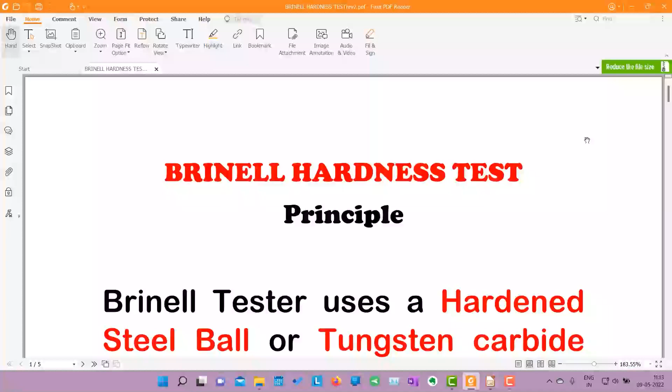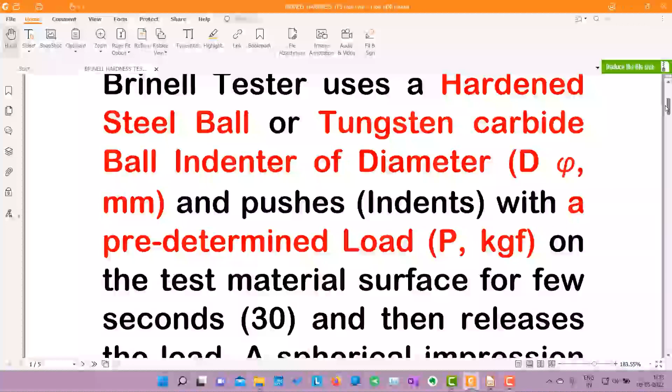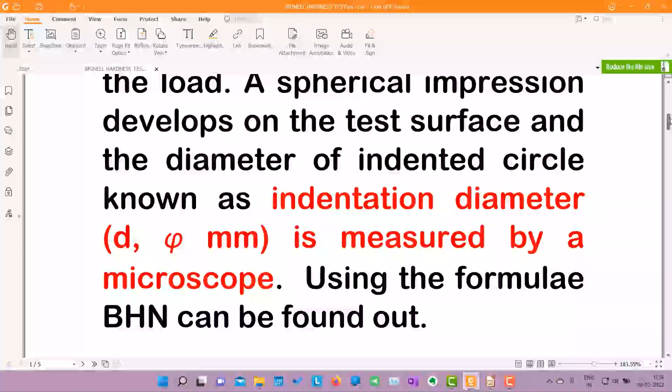Brinell hardness test, in principle, is a very traditional hardness testing method. It uses a hardened steel ball or tungsten carbide ball indenter of diameter D, and pushes or indents with a predetermined load P on the test material surface for 30 seconds, then releases the load. A spherical impression develops on the test surface, and the diameter of the indented circle, known as indentation diameter small d, is measured by a microscope.

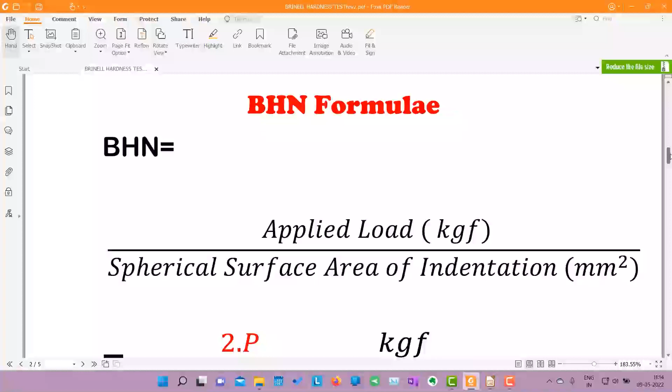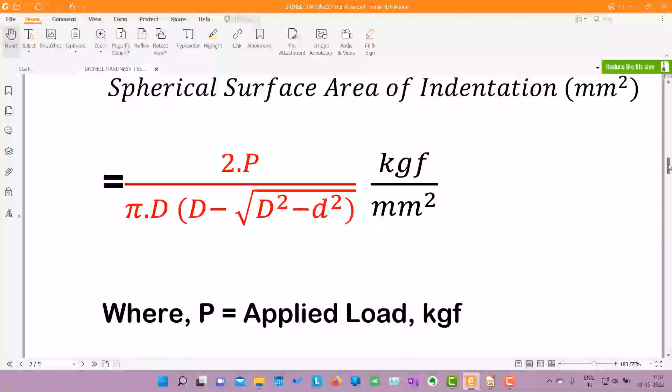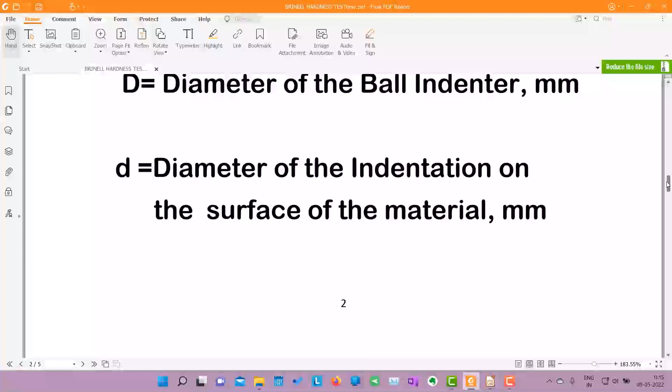Using the formula, BHN, the Brinell hardness number, can be found out. This is given by applied load divided by spherical surface area of indentation in millimeter square. In formula, this is given by 2P divided by pi capital D, within bracket, capital D minus under root of capital D square minus small d square. Here P is the applied load in kgf, capital D is the diameter of the ball indenter, and small d is the diameter of indentation made on the surface of the material, in millimeter.

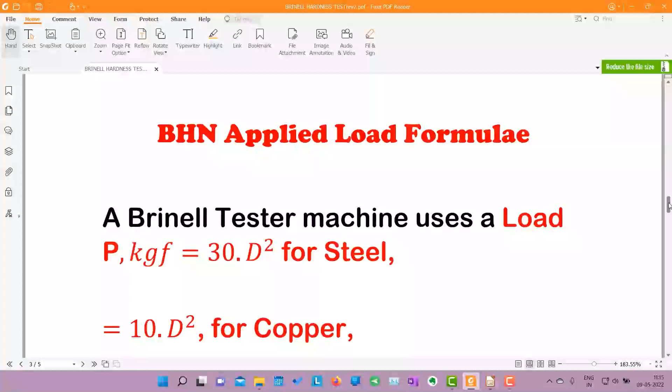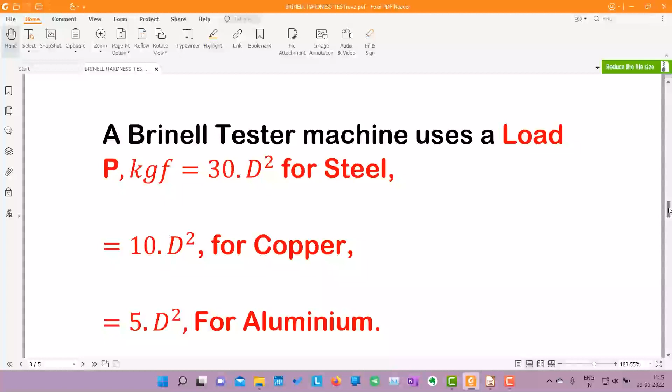Now, how do we determine the applied load P? It depends on the type of material. For example, for steel this is given by 30 D square, where D is the diameter of the indenter, hardened steel ball or tungsten carbide indenter. For steel, 30 D square; for copper, 10 D square; and for aluminium, 5 D square.

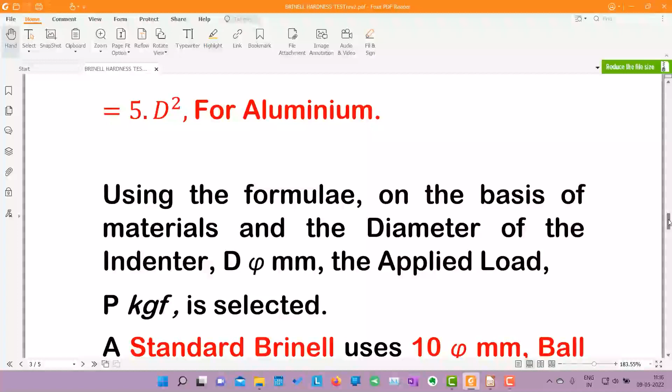So we have to calculate what will be the applied load for our tester, and this will be calculated using this formula depending on the type of material.

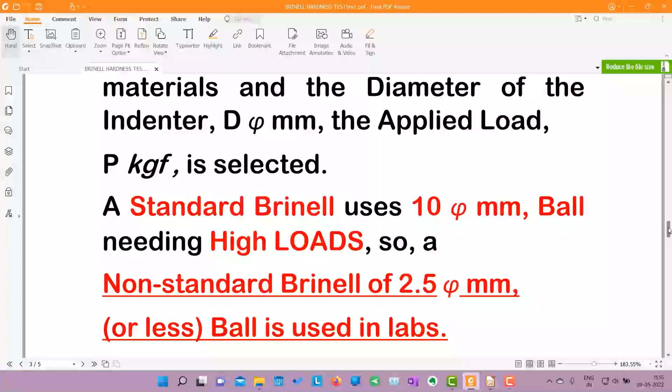For a standard Brinell test, the ball indenter diameter is given as 10 millimeters. It's a huge, large ball, and it needs high loads, around 3000 kg. 10 square is 100, into 30 gives 3000 kg, which is a huge load. Only a plant or a big factory can accommodate this. So in a laboratory, we generally use a non-standard Brinell test, where the diameter of the indenter is 2.5, or 1.5, or 1, depending on the type of lab we are using.

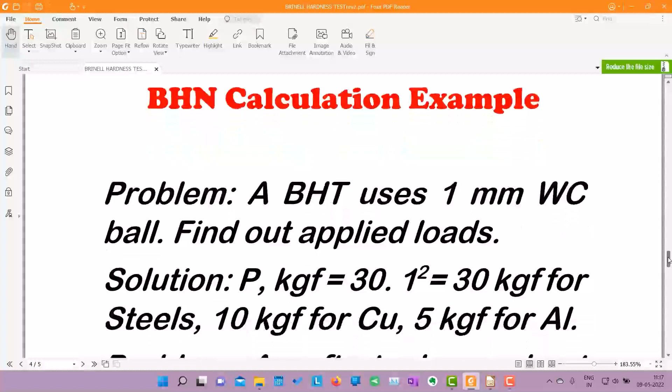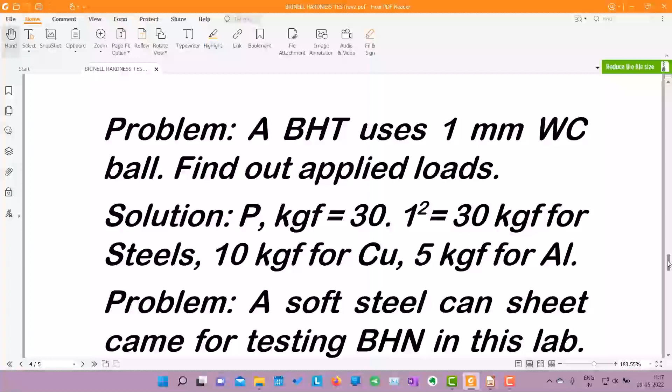Now a BHN calculation example will be enough to understand it. Suppose we take a problem: a BHT, Brinell hardness tester, uses a 1 millimeter tungsten carbide ball. Find out the applied loads. Now P equals 30 d square, 30 into 1 square equals 30 kgf for steel material, 10 kgf for copper, and 5 kgf for aluminium.

Next problem: a soft steel can sheet came for testing BHN in this laboratory. If the diameter of indentation is measured as 630 micron, find out the BHN of the material. Now, solution.

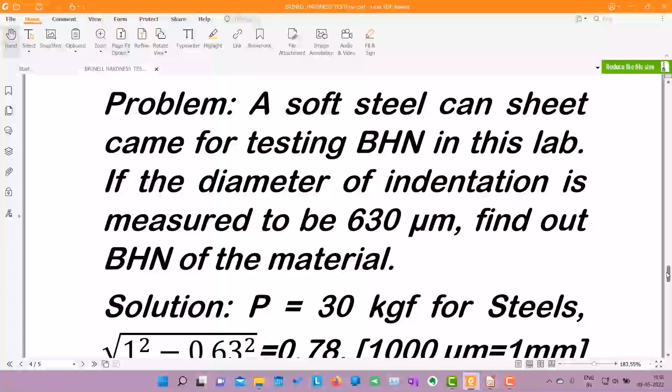P is equal to 30 kgf for steel. So root over capital D square minus small d square, that is under root of 1 square minus 0.63 square, is equal to 0.78. Now we know 1000 micron equals 1 millimeter, so 630 micron is equal to 0.63 millimeter. Now the denominator, 1 minus root over 1 square minus 0.63 square, is equal to 0.22.

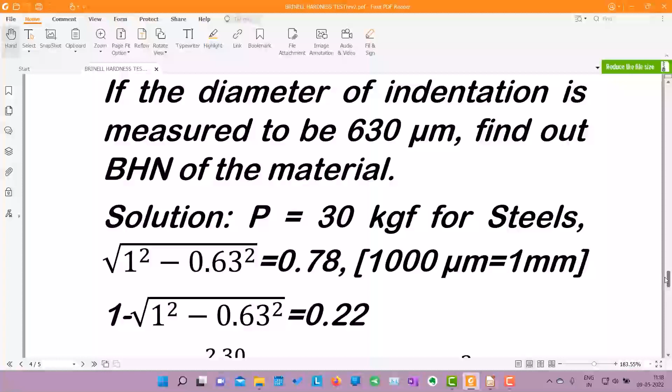So if we now put these values in the formula, BHN equals 2 into 30 divided by pi into capital D 1 into 0.22. It comes out to 85 kgf per millimeter square. So we will write BHN as 85. This is more or less a very soft steel.

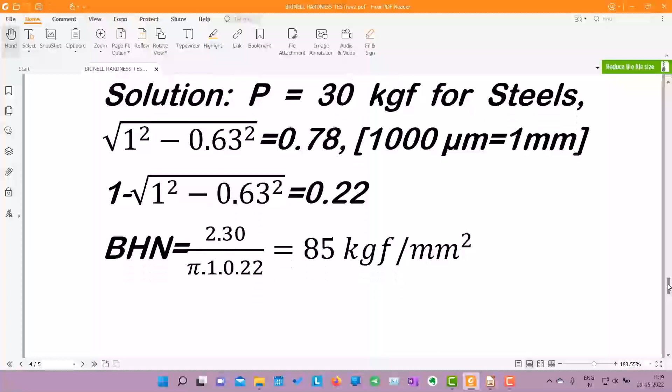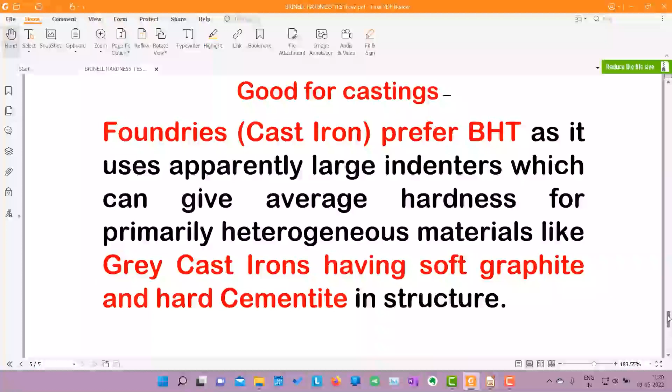Now, a word of caution when you start Brinell hardness testing: it is good for castings. Particularly, grey cast iron foundries prefer BHT, the Brinell hardness tester, as it uses apparently large indenters which can give average hardness for primarily heterogeneous materials like grey cast irons, having very soft graphite and hard cementite. Graphite is very soft, you use it in pencils for writing, but cementite is very hard. So when both soft and hard phases, that is material constituents, are present in the material, we can use BHN.

BHN can be very much suitable for medium hard materials, as for very soft as well as very hard materials, sinking in or ridging up defects are common. So for medium hard materials, BHN is generally used. It should not be used for very soft materials like lead, zinc, etc., nor should it be used on hardened steel, because the indenter ball is already hardened.

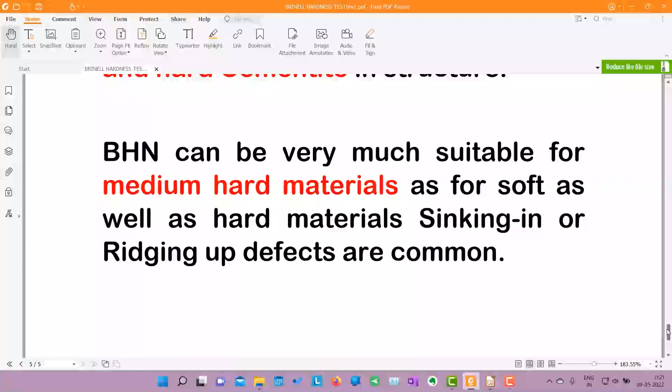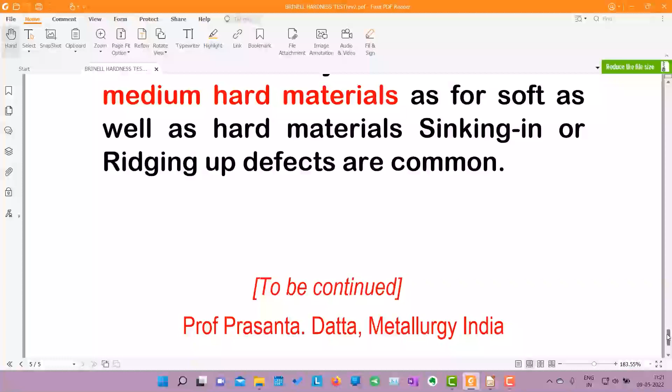So in those cases, there is a chance of defect. This is so far about the Brinell hardness test, and we will continue this program in the next lecture with the Vickers hardness test.